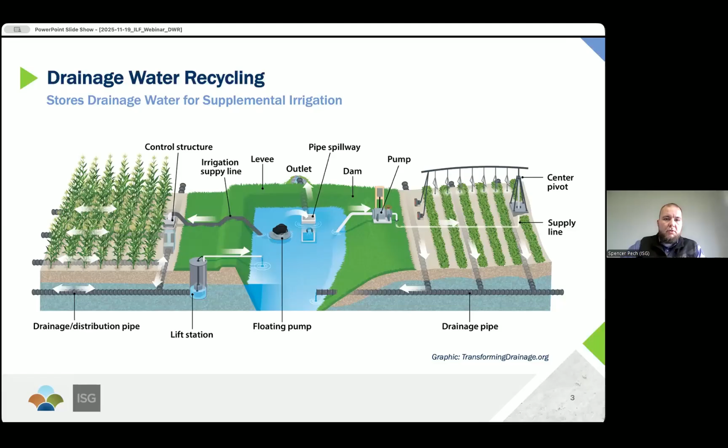What we want to do with this graphic is just kind of show that, and then we're going to kind of jump into how we sort of outlined the drainage water recycling site for this study. So before we do that, I just want to talk a little bit about how to frame up the study.

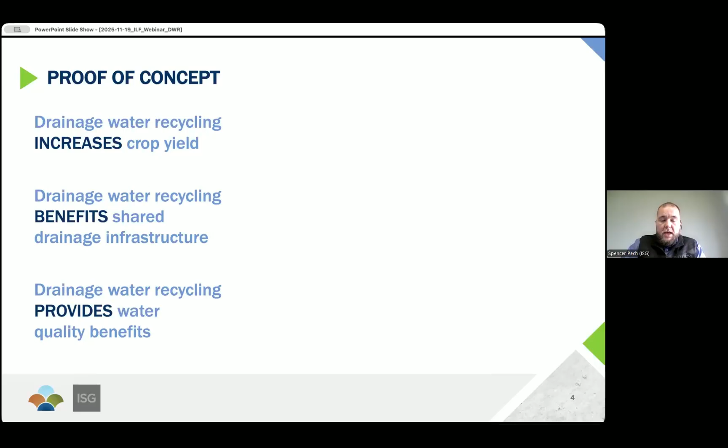So for those that maybe aren't as familiar, there's a lot of previous research that was done around drainage water recycling. And what we found from some of the preliminary research is that drainage water recycling does increase crop yields. And it does provide benefits to shared drainage infrastructure. And additionally, drainage water recycling does provide water quality benefits.

We know a lot about those independently, but maybe what we don't know as much about is what are the economics of drainage water recycling as a practice, looking holistically at it. Do those crop yield increases pay for the cost? Are those benefits measurable to the drainage infrastructure? And how do those water quality benefits compare to other practices?

And so we're going to jump into now kind of the analysis that we did. And so starting out with the methodology, as I mentioned, these sites can take a lot of different shapes and sizes. And so in order to frame up our study, we developed what we call the model site. And so thinking about the different components of that model site, there's the drainage, and then the storage, and then the irrigation. And so thinking about the drainage area, actually I'll start with the irrigation area.

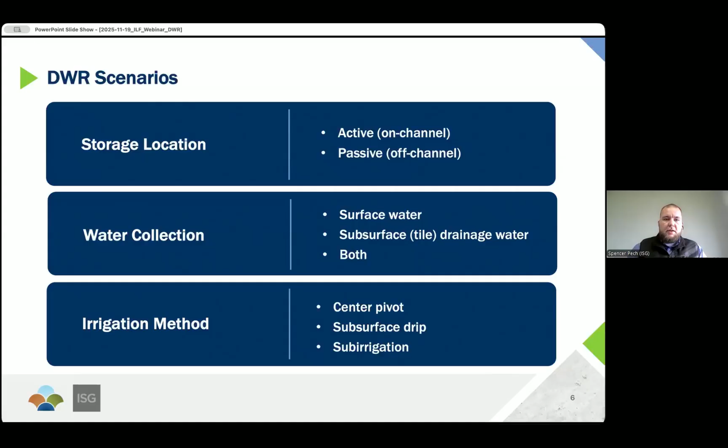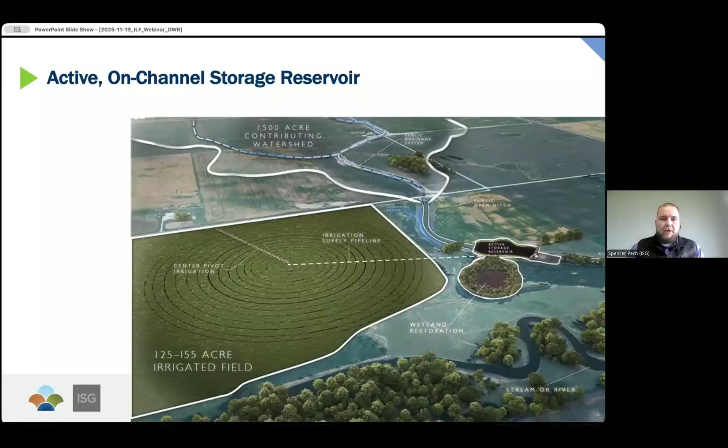The last piece I just want to mention on this too, we'll talk about a little more later, but we also showed some other potential. One of the great things about drainage water recycling is you can add a lot of other infrastructure components into it. And so we have a wetland restoration and a saturated buffer shown as sort of supplemental natural infrastructure to improve our water quality benefits as well. And then obviously downstream of all this, we have our stream or river that the excess water would flow into.

So if we look at the passive storage reservoir, you'll notice really pretty much everything is the same as the active, except our storage reservoir is off to the side of the channel. And in this case, we're passively collecting some portion of the water from the channel or the stream, or in this case, drainage ditch, and we're collecting that in the storage reservoir.

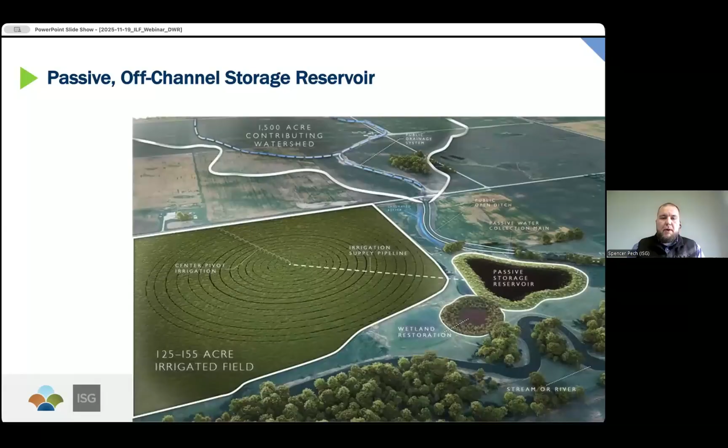But the important distinction is that we're not collecting all of that water, and we're allowing some of that water to bypass that channel across. So that gives a little bit of visualization and direction on what this model site that we completed our analysis on is. And I think on the next slide, we talk a little more about the storage.

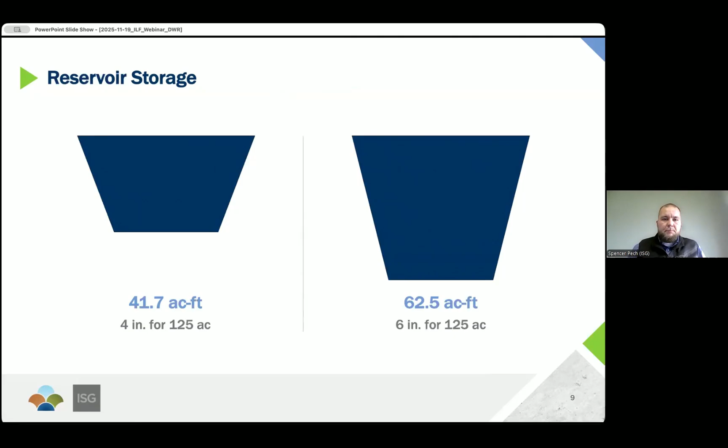Yeah, and then as Spencer mentioned, we looked at three different types of irrigation. So center pivot, probably the most common form of irrigation in the U.S. and one of the most cost-effective forms of irrigation. We looked at subsurface drip, which is becoming popular on smaller sites or oddly shaped fields where center pivot maybe doesn't fit as well. And then because we're looking in subsurface drained areas, there's often some interest in being able to use the drainage system itself as the form of irrigation and not have to invest in separate irrigation infrastructure. So we looked at that idea of sub irrigation as well.

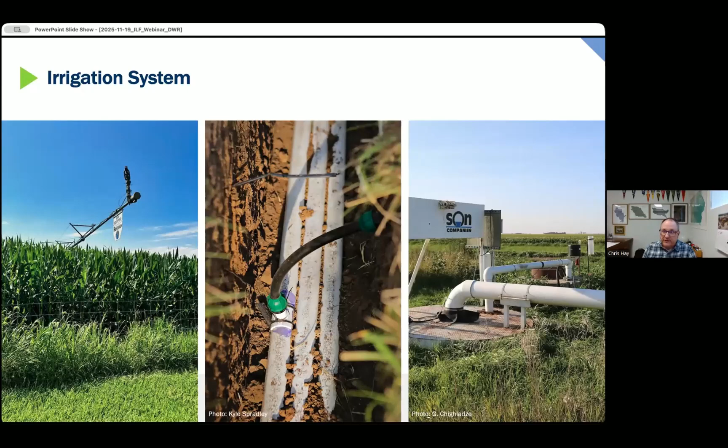So then looking at the different costs that went into our analysis, obviously there's the public and private drainage system cost. There's design and planning that goes into designing the systems, some site investigation that has to happen. In many cases, there may be some storage and land easement and some acquisition costs that go into that storage, as well as the construction costs. Obviously, construction costs for the irrigation as well, ongoing operations and maintenance, and then monitoring and management of those systems as well.

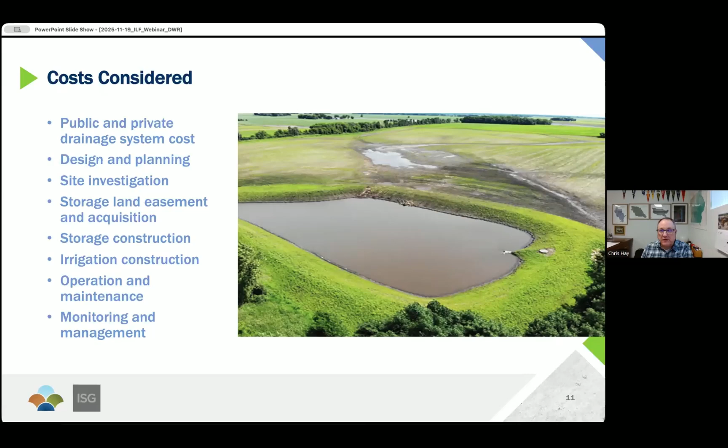So we look at storage construction. That storage construction is largely a function of how much excavation we've got to do. So obviously the cheapest is if we're retrofitting some existing storage. In that case, much of the excavation's already been done, so that's obviously the cheapest. The most expensive would be the active tile, where if you're going to get down and capture all the water coming through a subsurface drainage main, there's going to be quite a bit of excavation to get down to that level where the main's at to be able to capture all that water. And so the rest of the costs are distributed in there, again, largely a function of how much excavation has to happen.

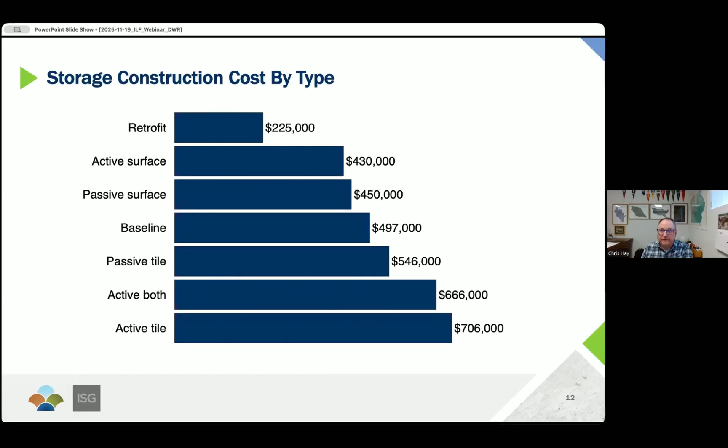They can irrigate a little more area because they don't have the corners that we've got with the center pivot system. Operations and maintenance a little bit less than the center pivot, and the lifespan similar for subsurface drip. We estimated a little longer lifespan for the sub irrigation. So when we apply those costs over time, taking into account the time value of money, we can look at an equivalent annual cost of those systems. Again, center pivot works out to be the most cost effective of those systems, with sub irrigation and subsurface drip pretty similar.

So that was the cost side. Now, if we look on the benefit side of the equation, some of the benefits we looked at were what are the yield improvements from that supplemental irrigation? Maybe some potential yield improvements from upgrading the drainage infrastructure as well. Some farm operation savings because we've added this new management capability with the irrigation. So options like fertigation, chemigation, some of those types of things may provide some operational savings.

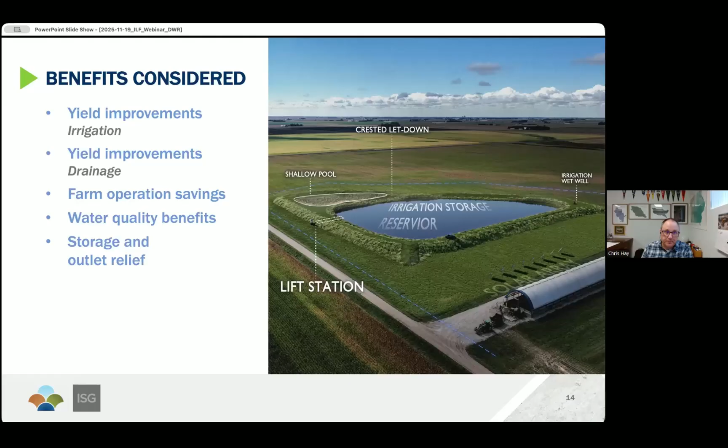He had done some work with one of the ag economists at Iowa State, looking at corn prices basically since 2000. And then the ERS, that's the USDA Economic Research Service. So they've done some projections out 10 years of what corn prices may do over the next 10 years. And so we kind of looked at what corn prices look like now versus what they might look like in 10 years. The other thing that factors in there is crop yield.

And so for center pivot and subsurface drip, we base that off of what we've observed for the systems we've monitored in Iowa. For sub-irrigation, unfortunately, we don't have good yield information on sub-irrigation in Iowa, so we're relying on some sub-irrigation yield estimates from the Transforming Drainage Project, a little more region-wide. So they were a little less than what we've seen so far in Iowa center pivots, and so again, we see a higher benefit with the center pivot and subsurface drip, a little lower with the sub-irrigation.

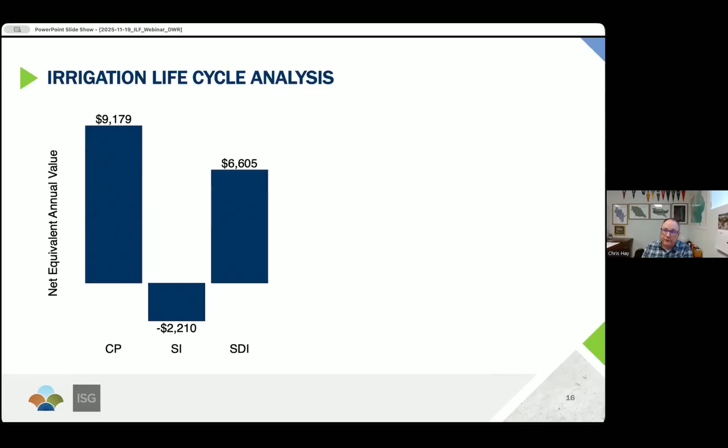So then applying our benefits and costs together, then kind of looking at the life cycle analysis, again, the net equivalent value of that irrigation is highest with center pivot, a little less with subsurface drip. Because of some of the assumptions we made, and I'll get into that on the next slide, we actually ended up with a negative value for sub-irrigation. And so payback period with that center pivot was about 13 years, subsurface drip about 19 years.

So I mentioned we had a negative value with sub-irrigation, and some of that was some of the assumptions that we were working with in this analysis, because of working with Environmental Defense Fund, and part of what they were wanting to look at is not increasing any of the drainage benefit of that. And so that was kind of the assumptions we were working under.

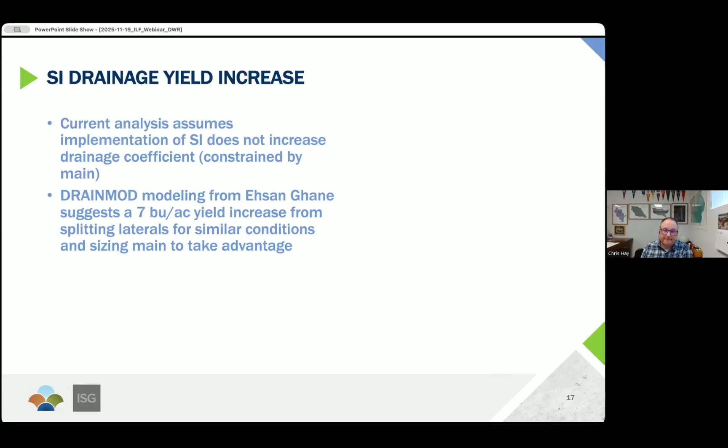But depending on who's paying for this and how those constraints are, if you do upgrade that drainage system at the same time that you're implementing sub-irrigation, some of the work that a colleague out of Michigan State's done has shown that we may expect about a 7 bushel per acre yield increase from that sub-irrigation if we size the system to accommodate that. So once we do that, then we can see some potential additional drainage benefit of $27 to $30 per acre. If we factor that into that analysis, that actually does turn that sub-irrigation value positive.

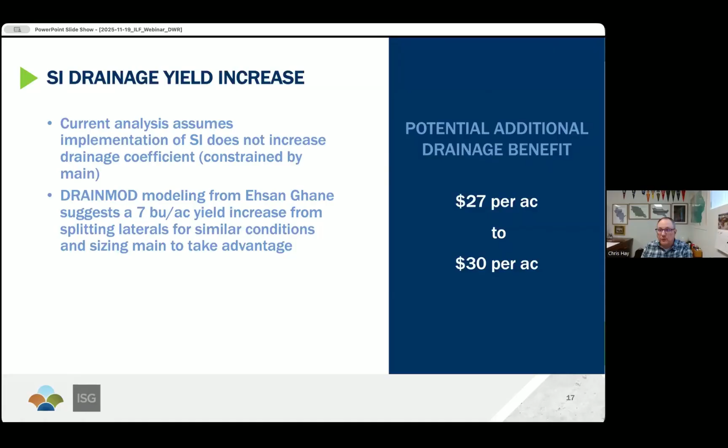And so again, it's going to be a function of who's paying for investing in these systems and what their constraints are, but there may be some benefit for sub-irrigation as well. But overall, still center pivot was our most cost-effective form of irrigation.

Looking at water quality, we've just got a few years of water quality data from our monitoring in Iowa, and it's biased by them mostly being a couple of pretty dry years. And so we had really, really high water quality benefits. So that's good to see, but also probably not reflective of what we might see over the longer term.

So to get an idea of what it might look like longer term, these are based on a review of a number of different reservoirs worldwide on what the nutrient reduction benefits of those reservoirs are. And so applying those standard reductions based on that analysis of reservoirs, we looked at the low end and the high end of what we might see for water quality benefits. So the low end would be that 4-inch passive or off-stream reservoir. So we don't have as much storage, and we're only filling that storage when there's storage available to fill.

And so of that catchment yield, or what is coming from that 1,500 acres upstream, a lot of that is going to bypass just because we don't have a place to put that water. And so it's going to continue on downstream, and those nutrients that are in that water will also continue downstream.

What we do pump into the reservoir then, we do see quite a bit of reduction of that. So of the 1,400 pounds or so of nitrogen that comes in, 600 just gets reduced just from processes in the reservoir. Another 700 or so gets irrigated back onto the field, and so we assume that's going to be taken up by the crop or otherwise not make it back downstream. And then there's a little bit of seepage loss in there.

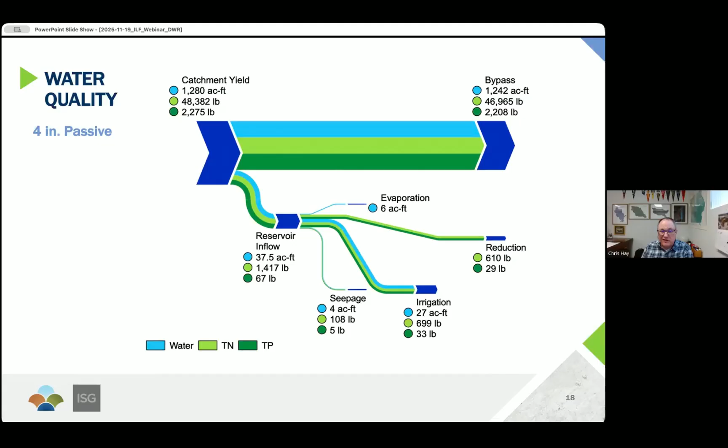On the other end of the spectrum, then, if we look at the 6-inch larger storage and then also active, so all the water coming from that catchment area is going through the storage, we still are going to have to bypass some of that water because we just won't have enough storage for all of that. But all of that water does get some level of treatment. And so that reservoir reduction number goes up dramatically.

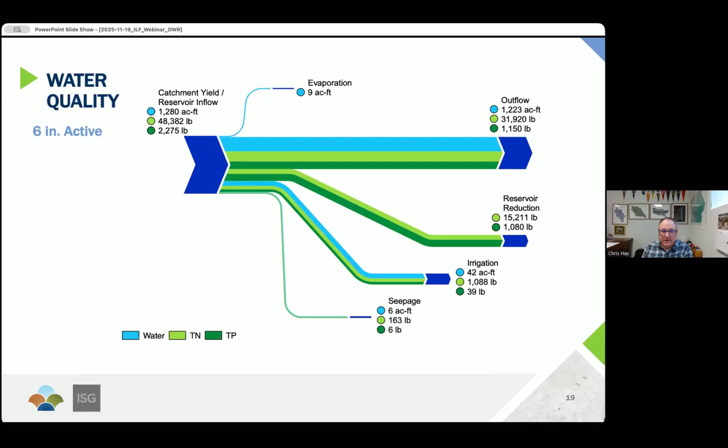So 15,000 pounds of nitrogen reduction. Again, quite a bit that goes into irrigation as well, 1,000 pounds more because we've got a little larger reservoir, more water available to recycle back to the field as irrigation. So again, a much bigger benefit with that active storage and larger storage.

So finally, we took those costs, those benefits, and then looked at how we might kind of package those together in some investment scenarios. And one of the things that this showed was it'd be really tough to justify this for the farmer to invest in entirely themselves. We can see that there's an irrigation benefit, but to pay for the storage as well would be challenging if it's purely privately funded.

And so we looked at pairing private investment in the irrigation system for the agricultural benefit to the farmer, along with some public or other investment in the storage for the water quality benefits that accrue downstream. And so looking at a couple different scenarios and what those look like. Again, active storage, more water quality benefits. So that's going to be more attractive for folks interested in paying for those water quality benefits that had a sizable net present value, great return on investment, payback period about 13 years.

One other thing we looked at was a community storage investment scenario where we're pairing three different irrigated fields, all drawing from the same reservoir. And so we get some economies of scale that way. And so with those economies of scale, we see a larger net present value. Again, good return on investment, a little bit longer payback period, but another really attractive scenario.

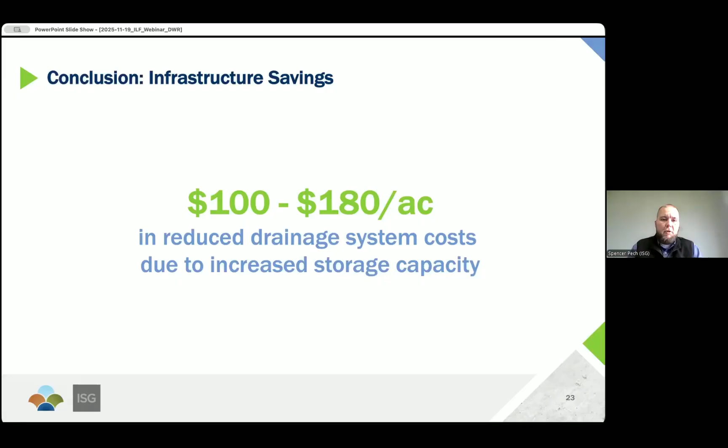And then the last piece that we also mentioned was just the infrastructure savings. I know we didn't go too in depth in this, but I think I talked about this on a previous Iowa Learning Farms webinar back in the day. But some of the savings that say a shared drainage system might see from implementing storage, because that storage provides some outlet relief and allows for a smaller main to be utilized and provide the same level of drainage for the system.

And so just want to kind of summarize some of our key takeaways from the study. So the first thing is that we found that drainage water recycling can be cost effective when you look at it holistically. And as Chris mentioned there, active basins with center pivots were the most cost effective because we're maximizing the benefits and also slightly lower cost with the center pivot as well. And so while they are economically viable, it's important that the site is well sited and well designed, meaning that you've got the right irrigation system designed for the constraints of your site.

And then that kind of leads into the second key takeaway, the importance of maximizing the benefits. So the sites are the most successful, as we saw, and have the best ROI when we achieve multiple benefits, whether that's maximizing the yield benefits from the irrigation and also maximizing the water quality benefits. Because the only way that these projects are successful is ultimately if they provide benefits to that variety of stakeholders, including some of that public funding that we need to have to make these projects possible. So when we can maximize those benefits and we can have that funding to help pay for the water quality components, that makes the projects cost effective.

And ultimately, we did find in our analysis, especially for our model site, that in most situations the project is likely not economically feasible without some level of outside funding. But the good news is that drainage water recycling is comparable to a lot of other more widely adopted best management practices in terms of its efficiency in nutrient removal and cost per pound of removal. And so it appears, at least from our work, that the investment into these types of systems for the storage and water quality components is justified, especially when we look at those active sites that have the higher potential for nutrient removal.